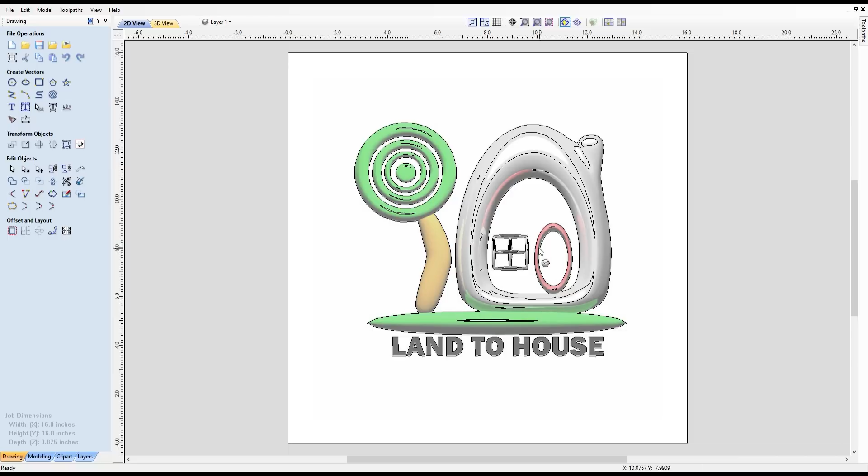So I used that bitmap trace to get just the edges, and now I have to go in and clean up the image a little bit, or a lot in this case. Some images come straight in and I have to do a minimal amount of cleanup, but these ones are not quite so simple.

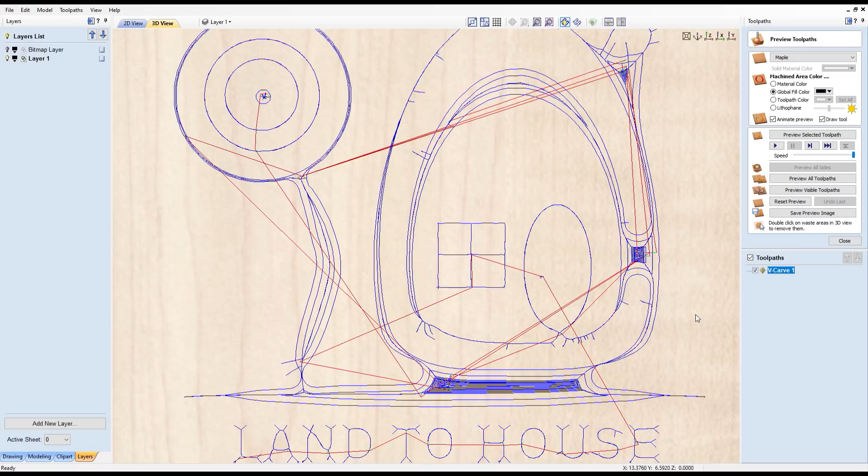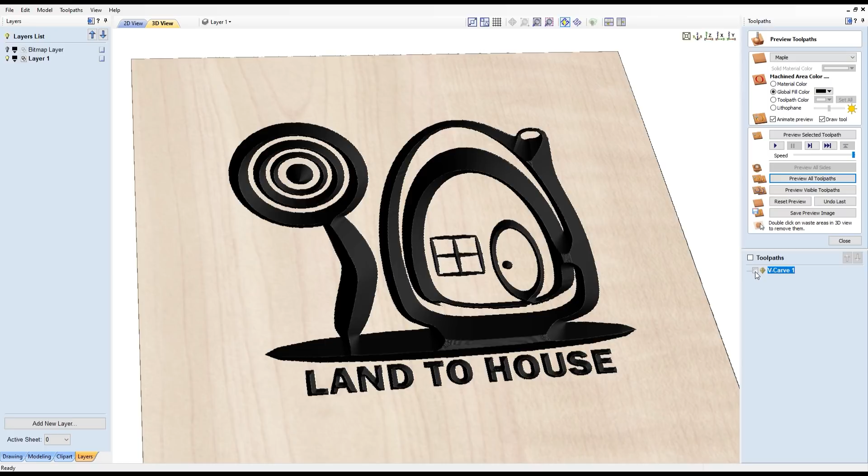Now I went into VCarve and I selected basic. I think this is a 60-degree V-bit, just to see what it looks like and show you guys what a normal V carving will appear as. And it doesn't quite reflect the shape of his logo. We can imply a little bit of design in our design here, I guess you could say, to make it more closely resemble what his logo actually looks like, because it looks like balloons or bubbles instead of these really sharp cutouts that are V shapes. So I'm going to have to go through and show that.

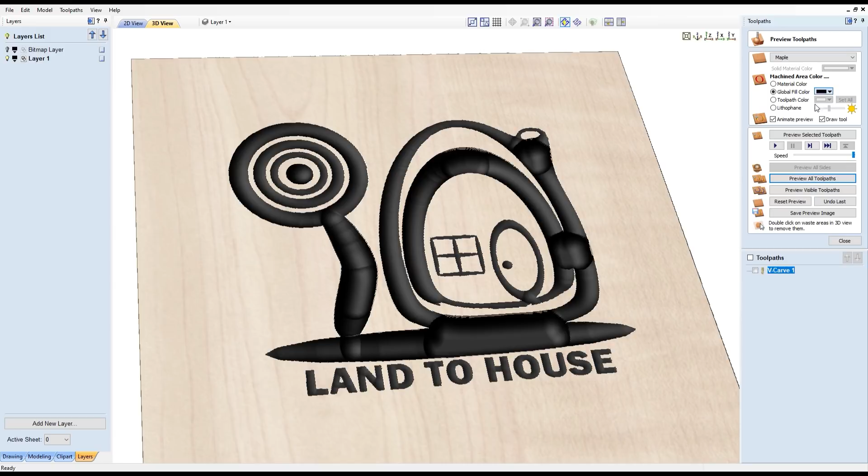And this is after I changed it to a ball nose carving bit. I'm going to change the color to just the material color so we can see the profile of it better. And you see how as it gets wider, it cuts deeper. That's how V carving works. So what we're going to do here is fudge the design so that it doesn't do that.

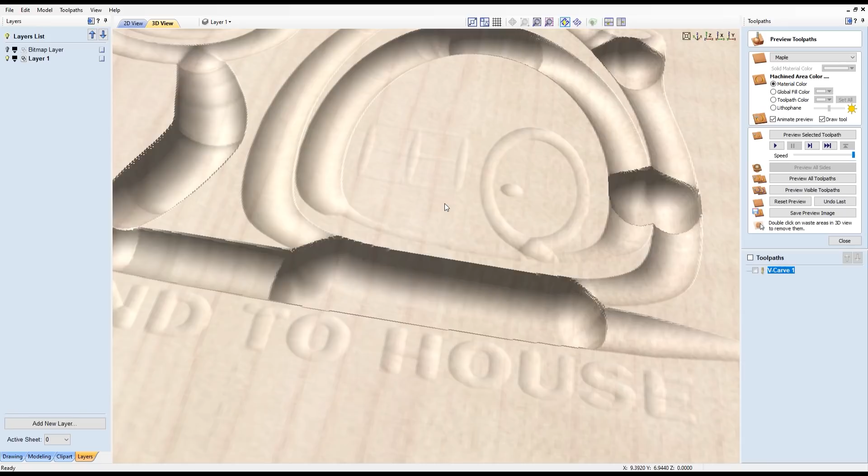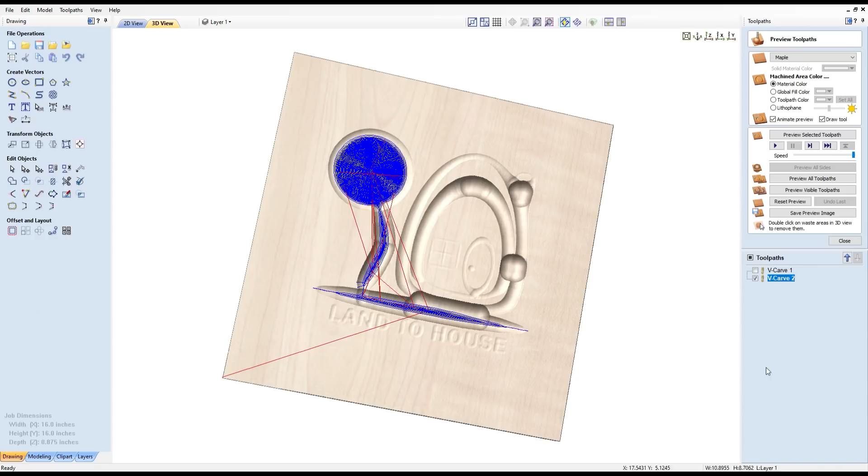Now, one thing we also notice here is that the window and the door, they don't quite have a very defined cutout. And we'll have to address that too with a smaller diameter ball nose bit. And here I go in and I add the lines that are missing to create the correct profile. And we preview it. And there, we get the appropriate design style that matches his logo, at least in that one little portion. So now I have to go around and do it to the rest of the design, and it should come out looking a lot better.

Many times when text comes in through a trace bitmap, it doesn't quite come out looking very good. So it's best to replace the text with something that you know is perfect. And in this case, I noticed that Franklin Gothic Heavy matched very closely to his existing font. So I'm just sizing it appropriately to completely replace the stuff that came in with the bitmap. I guess also delete the old text behind it. Easiest way to do it is to shift that to a new layer. Then we can hide it, select the old text, and delete it.

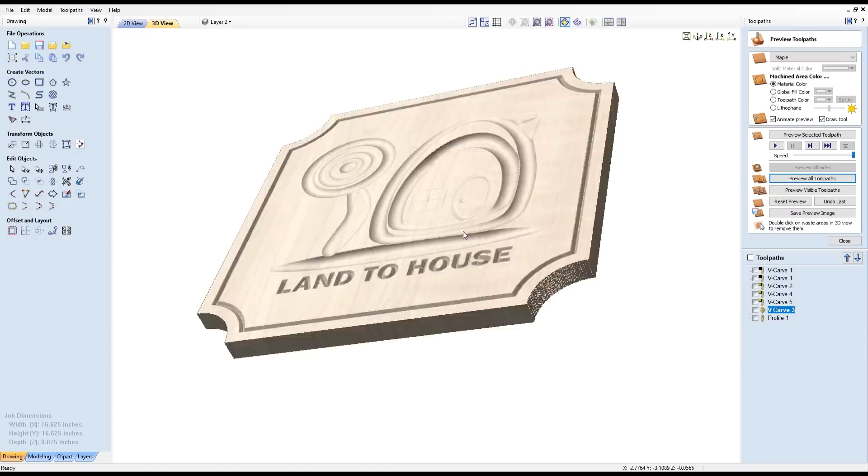Just like that. There we go. Got it. Here we see the new text on top of the old text, and the old text clearly looks goofy. It didn't quite trace in properly. And here I am just adding the profile and making the lead-ins and lead-outs work so that it creates a smooth cut on the edges.

I don't have a fancy wasteboard. This is the original wasteboard that came with it when I bought it last year. It may be the original wasteboard from when it was made in 2009, I don't know. But what I do is I just screw into either the workpiece or some wedges on the side of the workpiece just to hold it in place. But oftentimes that creates little puckers in the MDF. I just have to chisel them away so that there's no high spots.

I had just surfaced this 2 days ago, so it should be pretty flat to begin with. There's only a few things from when I was cutting out these shapes here. And I like to blow with my leaf blower. This thing works great.

Now, this is the workpiece that we're working with. I had previously prepared this, and it's just some maple boards that I glued up. I didn't really intend it to be book matched, but it looks like it's book matched here a little bit. So what I'm going to do is kind of line it up on the edge there so it's close to perpendicular. What I need to do is drill and screw it down in the four corners, and the design has room for the screws to hold it down.

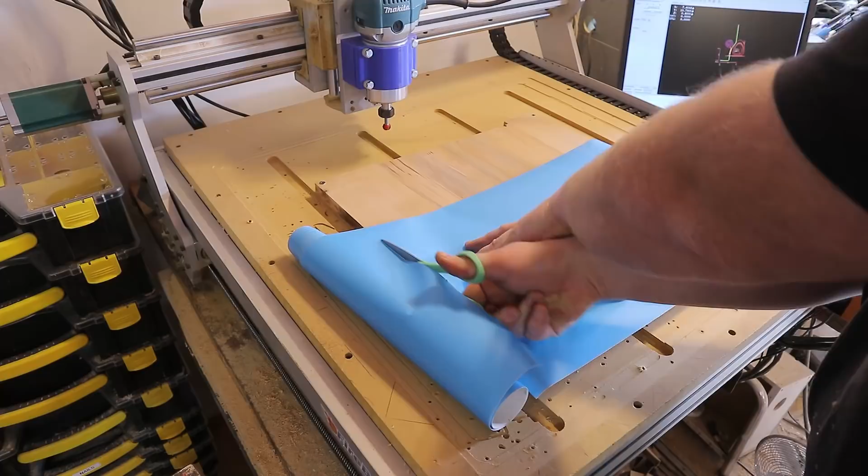Now this is getting a black paint, so the letters will be cut out and painted black. And to do that, I lay down what's called a stencil or painting mask. In this case, this material is Oramask 813, which is pretty much the industry standard for this type of work. I'll just get rid of you there.

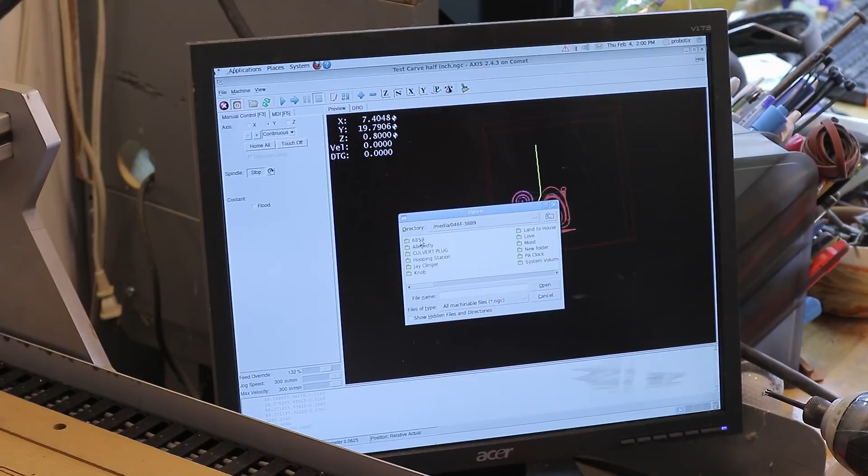Now on the computer I have a previous test run, so we're going to open, come on, wake up, open our new test cuts. Not test cuts, I guess there would be production cuts, huh? Is there a way to change the default here? Okay, I need to put the USB drive in. So here's all the files from VCarve. So it'd be nice, oh come on, to have a way to stop it from loading that screen. Alright, so there's our media. Land to house, and then I already have the 1/2 inch in there, so let's just do the 1/2 inch first. So open that, clear the paint, and then

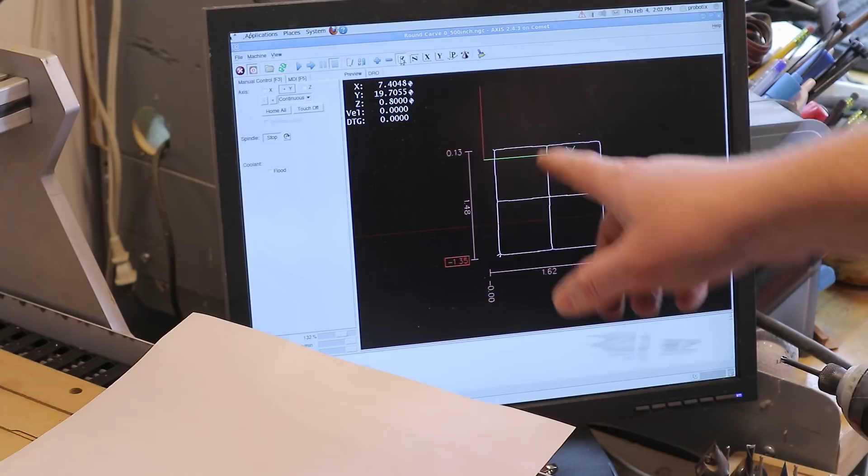so there's our file loaded up, and the center of the whole drawing is actually right here, so we have to get that first on our workpiece. Now this wood is kind of book matched, and it's offset to one side because of the way I did it. There's just too much wood on this side, so I'm gonna favor this side when I do the center. I know this is 16 wide, so if I go 8 1/4 over right there, that should give us enough room. And then from the short end here, a little more than 8 1/4, 8 3/8, and then just verify it's long enough on the other side, make sure that that's more than 8, and it is. This now is our approximate center. I'm going to home the machine to make sure everything is where it should be.

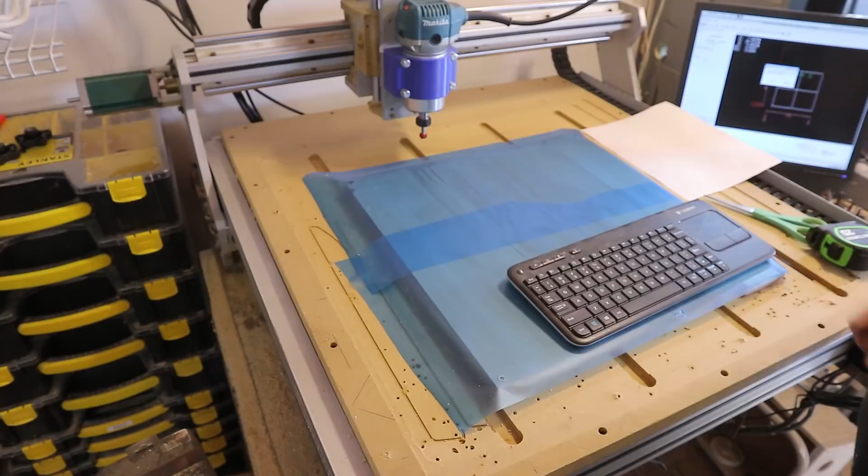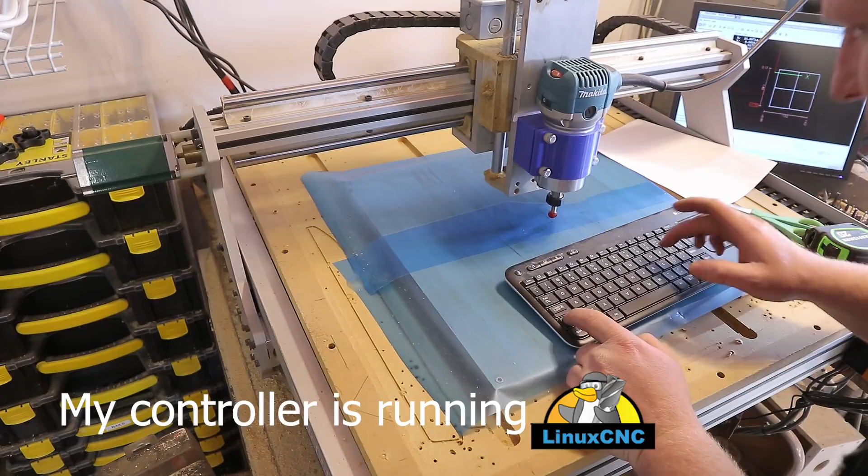Alright. So now we have to get it pretty close. So on the keyboard, if I hit the I, it goes to incremental, and then I can do little nudges. And Shift I goes back up to the more coarse incremental. So it's a lot faster. Alright, that looks really close. So this is 5/1000 increments. Nope. Yep, okay, that's touching it.

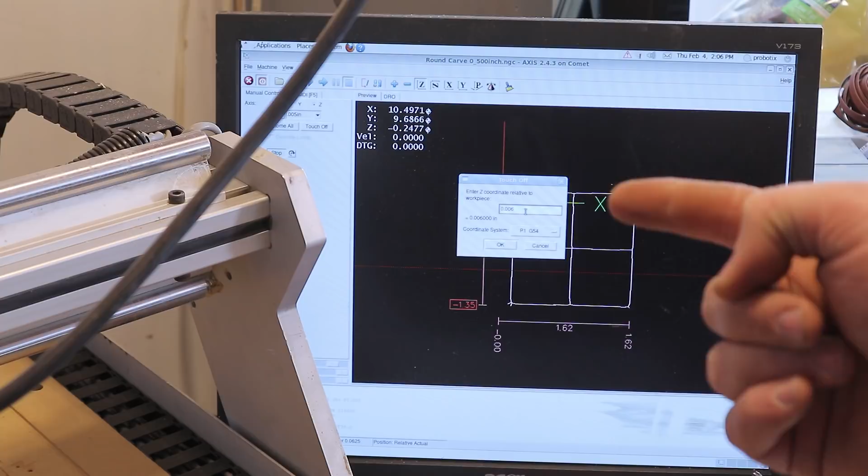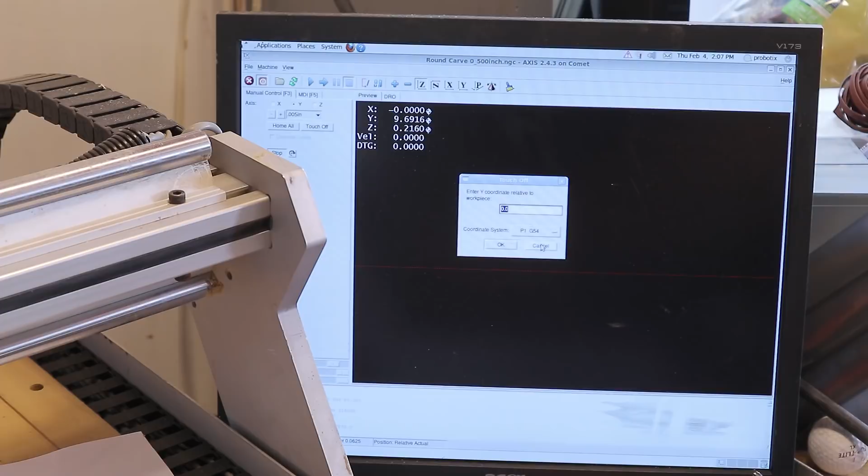Now I'm going to hit the touch off button, and where it is now is 5 thousandths approximately above the workpiece. Now let's make it 6. So that's 2 sheets of Oramask plus 1 sheet of paper, maybe 6 thousandths. It's a round bit, so it's not terribly critical anyways. Okay, I just did X and Y as well. So it's in X right now, so I hit the End key, that's 0, and now I hit the Y key, and the End key, and that's 0. So now it's 0 and 0, and now we're ready to cut. I'm going to turn this on, and maybe about 3 out of 6 is an okay speed for this.

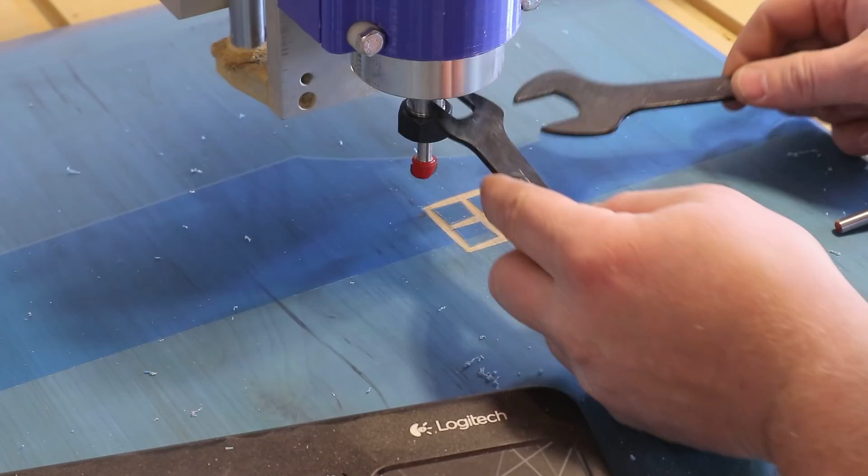Okay, now we can move on to the larger diameter cutter. And the way I usually do this is I set them up like this and I can just squeeze. And that doesn't put any torque on anything except just the nut. So this is a 1/2 inch, and then this is a 1 inch diameter on a 1/4 inch shank round over bit.

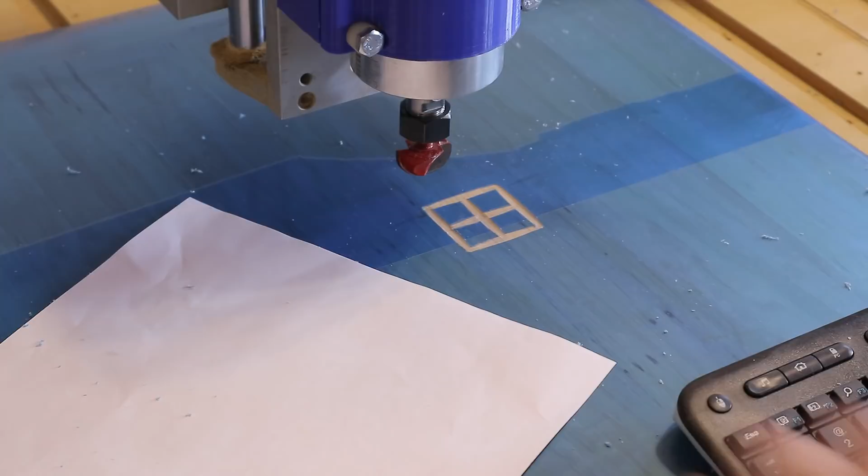And I'm going to chuck this up pretty far because the reduced stick out on this will increase its stiffness a lot, because there's a lot of spinning mass there. So now we move it over a little bit, and I'm going to re-zero this. Go to I.

Nope. Nope. Nope. Oh, a little bit. Let's go down. There. It's got a good drag on it. Now I'm going to zero the Z. And again, this is going to be 6 thousandths above the actual work surface.

I'm going to turn this, raise this up a little bit. I'm going to open the correct program, which is our round carving with a 1 inch diameter. And now this cut's going to take a while. When I turn this on, it's going to be at a lower speed, and I might adjust the speed to make it sound better. I don't know. That's not really a technical way to do this. Yeah.

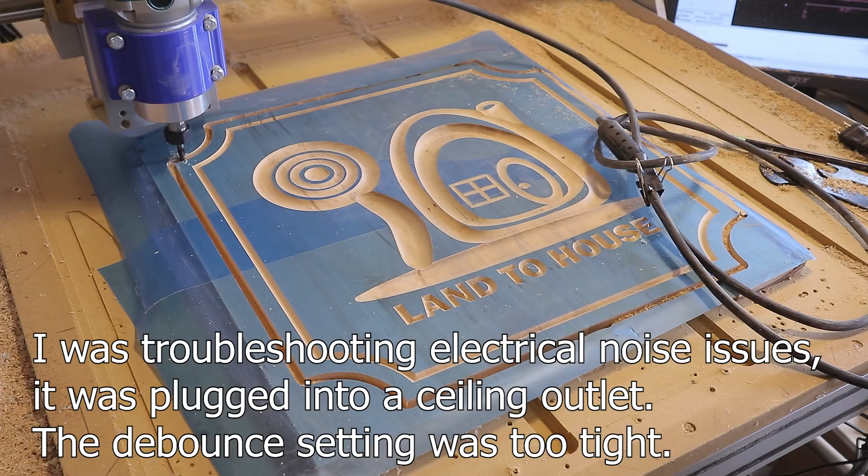Whoops! The router came unplugged. Yeah. Alright, the last freaking cut. Reset. I'm going to turn it back on and get the cutter head out of there. Now I need to rehome it. Okay, that's still in the right spot. I think it'll be fine, whatever happened there.

But I'm going to shrink this perimeter by a little bit because I didn't realize when it does a last pass, it just plunges, it doesn't feed in. So there's a little bit of a booger there. And then the top edge here, there's a knot or nail hole or a screw hole that's up there. So I'm going to redo the border in a little bit.

And ta-da! It's cut. There's two little tabs over here, but I know it cut all the way through, so I can just lift it up like that. So those tabs just broke off right in the middle. I don't know if you guys can... There we go. See that? And then right here's where it crashed because the router came unplugged.

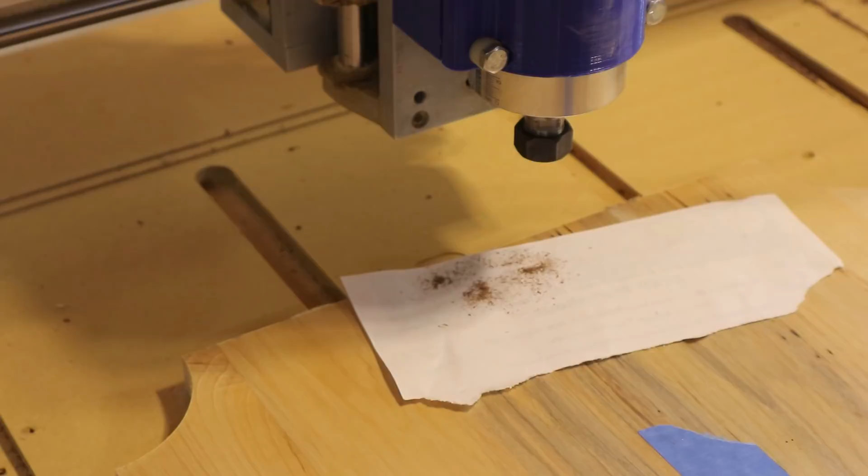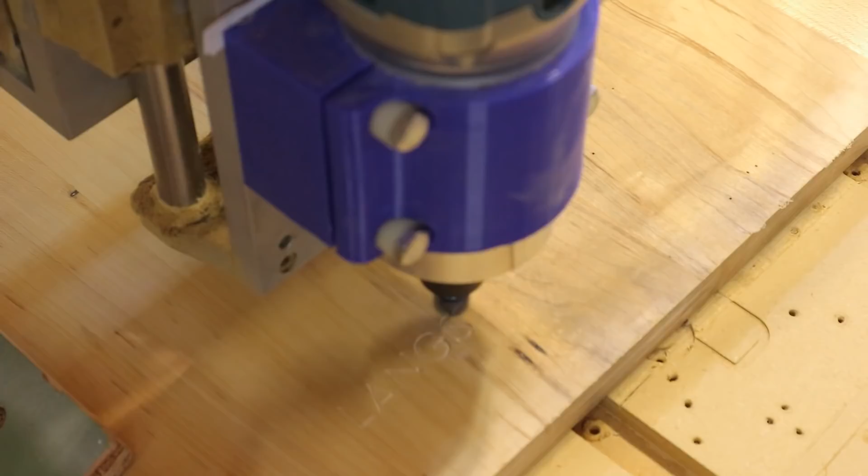So that's centered, and I'll show you guys the way that I prefer to hold things down. I've used these a whole bunch in the past few weeks to hold down pretty much everything. And yes, I do go right into my spoil board. Not going anywhere. Kind of stuck to the bottom.

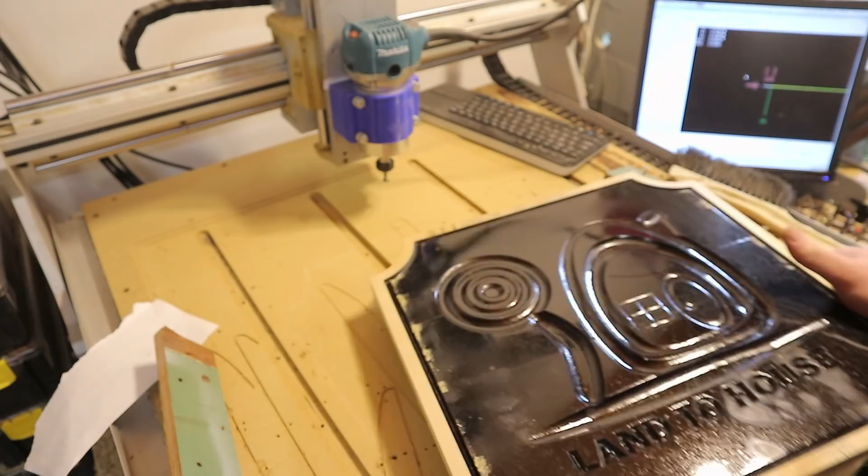Okay. There, we got a keyhole and some text engraved. Now, this bowed a little bit, so this isn't like a perfectly even engraving. Notice the L is really faint, and in the middle it's a lot deeper. This is bowed up a little bit. Okay, I guess we could finish peeling off this stuff and make it look all pretty, right? Ta-da!

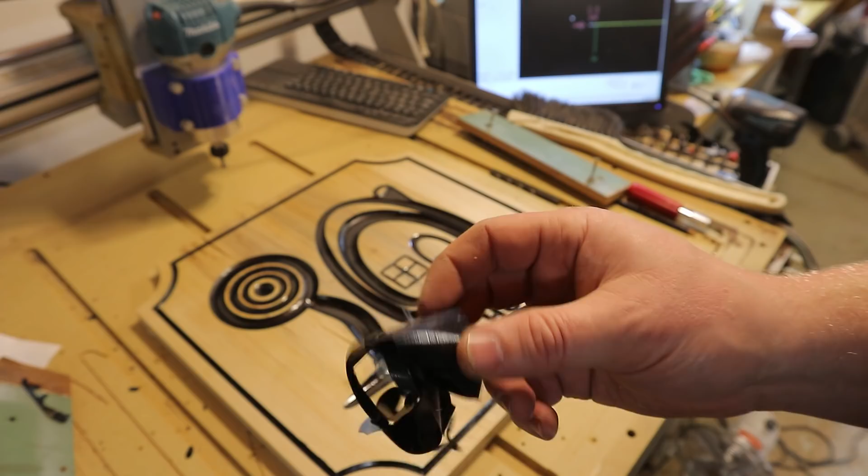Now I am going to give it a quick sanding after it completely cures, because there's a little bit of bleed, like right there. There's a little bit, and then right there, because that's where my knife touched it, and then there's another one right there. Again, because of the knife, it's just not perfect. A little bit there on the edge too. Got a little bit of bleed through and a little bit of pullback on this Oramask. If anybody knows the best paint to use that's not going to peel this back, let me know.

And here's the final product. I did unfortunately have a problem where I put the black paint in and then I sprayed the clear over from the same manufacturer, same style of can, after it's fully cured, and it crackled like this. So I don't know what I could have done differently with those products to prevent this.

I mean, the black had cured for 48 hours with heat, so it was completely cured. And spraying the clear on top of it made it wrinkle up. Made the clear wrinkle up, I presume. I presume the black stuff underneath was still stable. Both of the materials were this Krylon ColorMaxx.

I'm going to try some black lacquer and clear lacquer next time. I also have some shellac to try. So future signs will have potentially a different paint brand and paint type.

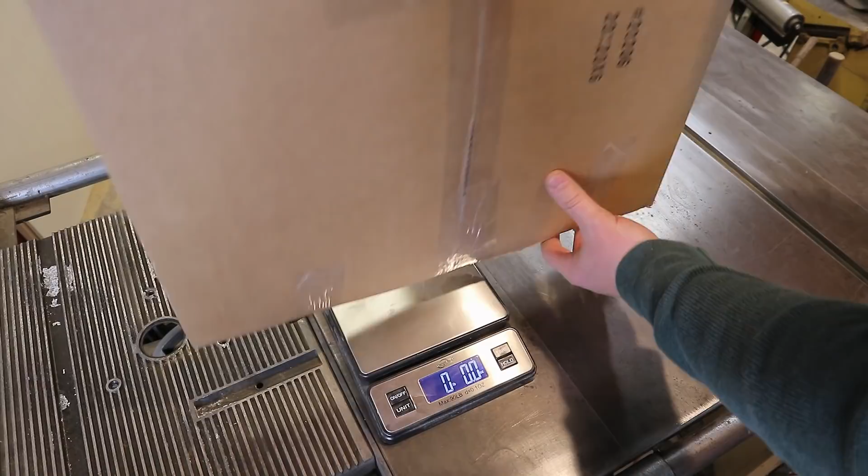And there we go. Just don't look at this side, okay? Look at that side, that one's the better side. Yep. Good job. And in case you were curious about the weight, I'm gonna guess 4 3/4 pounds, or 4 pounds 12 ounces. Nope, I was way off. 6 pounds 4 ounces. So we'll round it up to 6.5.

I'm filming this a few months after I completed that. I'm just getting around to it. And he got the sign, he likes it, and hopefully at the same time this video comes out, he will have another video coming out with the sign in it, installed in his shop.

So that's really cool. Some information about the stuff that I have used: this is a Probotix Comet CNC router. It does 25 inches by 25 inches on the bed. I also have links in the description for all of the tool bits that I used. I used a 1/4 inch downcut bit. Also, I was using a Makita 701 router, not my new spindle here, just to let you know.

And I'm still having issues with masking, like I'm working on this sign here for a customer. I had my masking stick. I used a card scraper to scrape off parts of the adhesive residue that stuck, and then I had to repaint it. So now I have to go in and touch up the colors where I repainted those areas where it stuck. So I'm still learning a lot of stuff, and it's taking a lot of time to do somewhat simple jobs like this. I suppose if you guys wanted to see what this looks like. There we go.